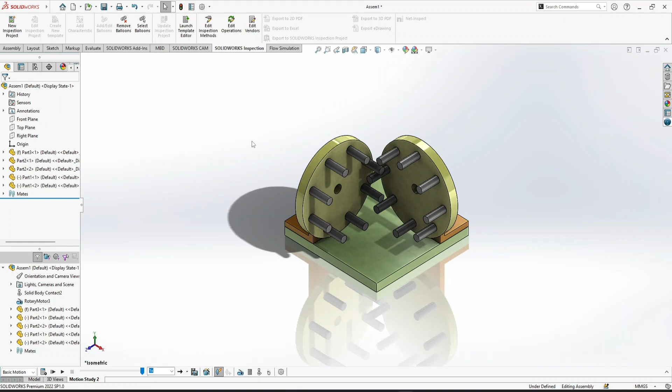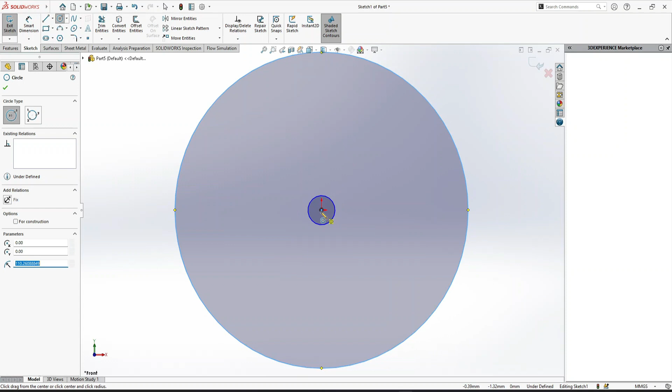Starting from the new part, we have to make three parts, then we will assemble them. So the first part will be the disc that will rotate. Select the front plane, sketch a circle, first and second and the third circle. The third circle, make the relation for construction and smart dimension.

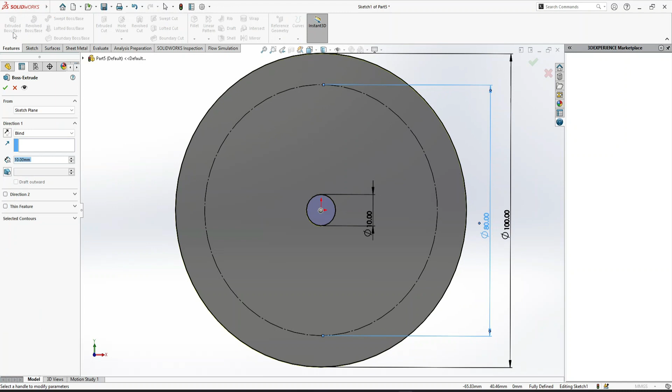The first one is 100 millimeters, second one is 10 mm, and this one is 80 mm. Now we are simply going to features, extrude boss base, 10 mm and OK.

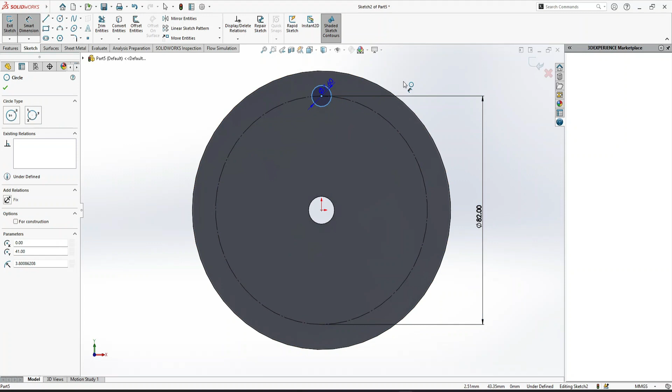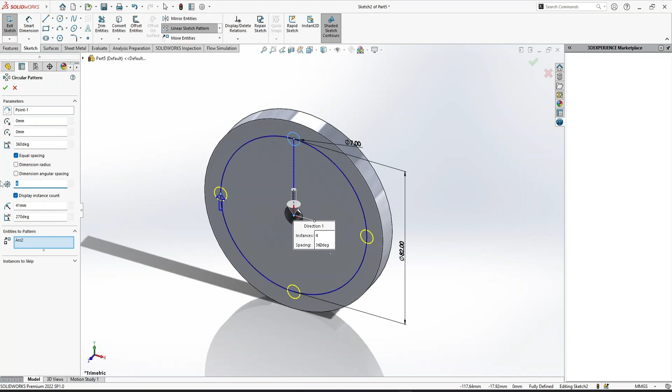Select the face, sketch, and here again I am going to make one circle, and for construction the second circle, this is going to be 82 mm, this is of 7 mm, and simply features extrude boss base, or you can extrude it here, or we have another option. We can go to sketch, circular sketch pattern, select the circle and 8 and OK.

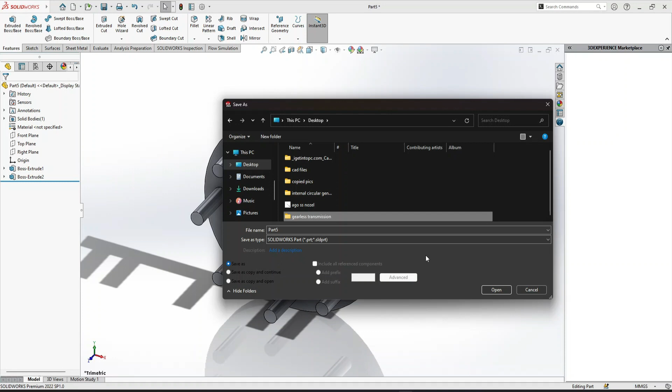Now features extrude boss base, and this is going to be of 25 mm depth and OK. Now after that you can save it. I'm going to desktop and new folder, that is gearless transmission, and in the gearless transmission this is our disk. Okay, now let's change its color. Okay, and now boss extrude, select this, and I'm going to change its color, and again Ctrl S to save it.

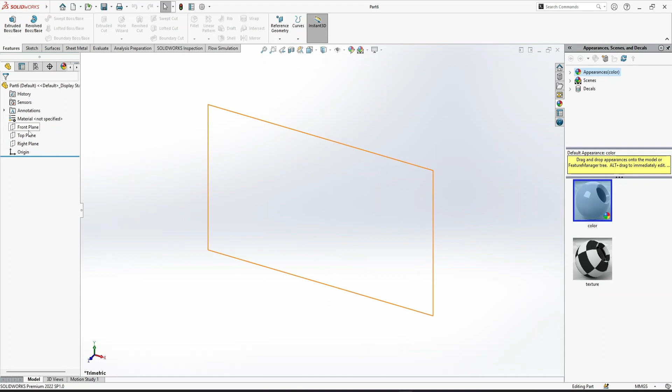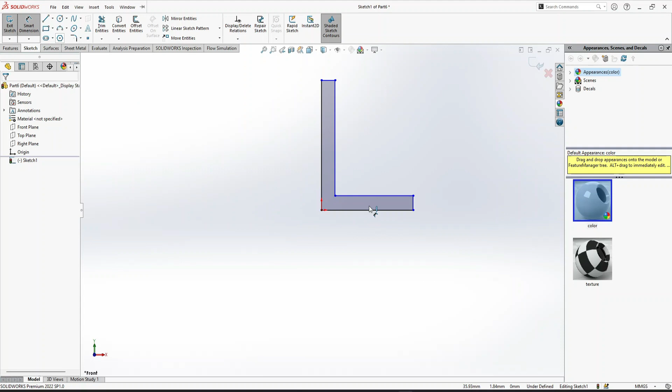Now the next part is front plane, or you can take a right plane, line from here to the origin. Close it, escape. Now select this line and this line and make the relation equal. Smart dimension, this is of 40, this is of 80 mm, and this is 6 mm. Control 7 for isometric view.

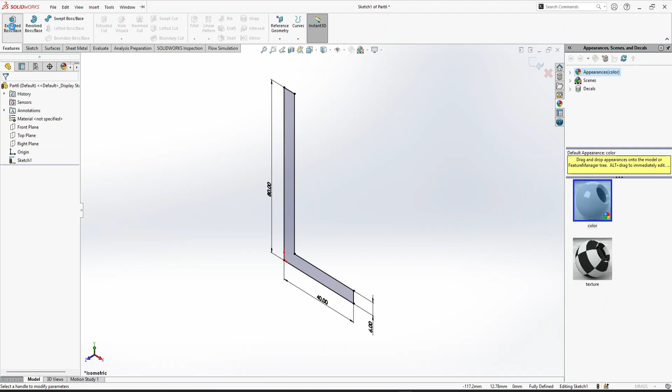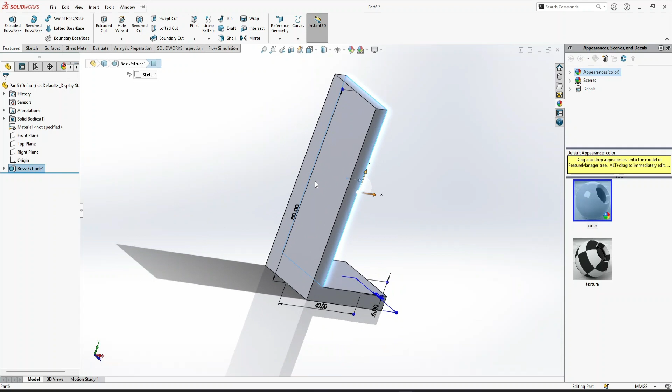And now features, extrude boss base, this is going to be of 30 mm and OK. One more thing, edit features, and we are going to use the mid plane. Now select, you can select this face or this face, it's up to you, both will work the same.

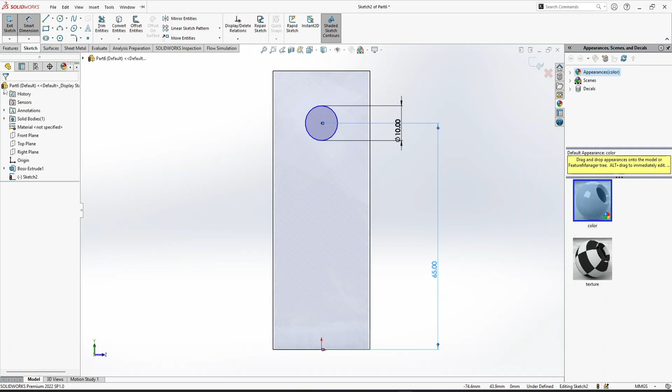Circle, smart dimension, this circle is of same 10 mm, and from here to the bottom distance is 65 mm. And features, extrude cut and OK. Now control 7 for isometric view. I'm going to fillet this edge, this edge. This is going to be 10 mm, okay.

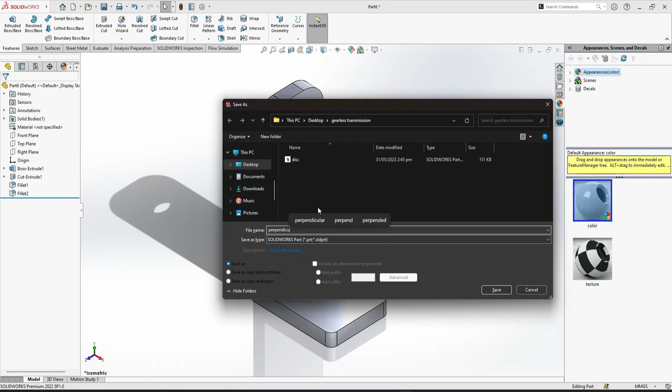And fillet this one and this one. This is going to be of 3 mm and okay. Control S. This is, you can say, the holders, or this is perpendicular support. Now next is the base.

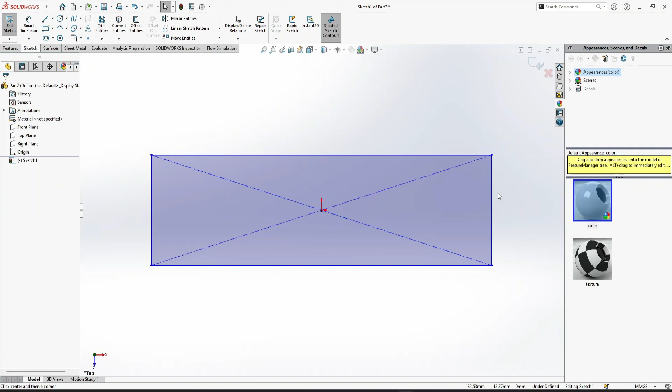For the base again part, and a simple top plane sketch. We have to select the center rectangle and make a rectangle, escape, select one and the second perpendicular line and make the relation equal. Smart dimension, this is of 130 mm of both sides. Now features extrude boss base, this is going to be of 10 mm and okay.

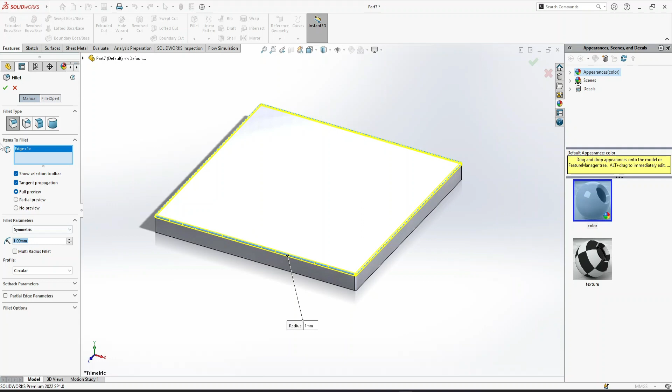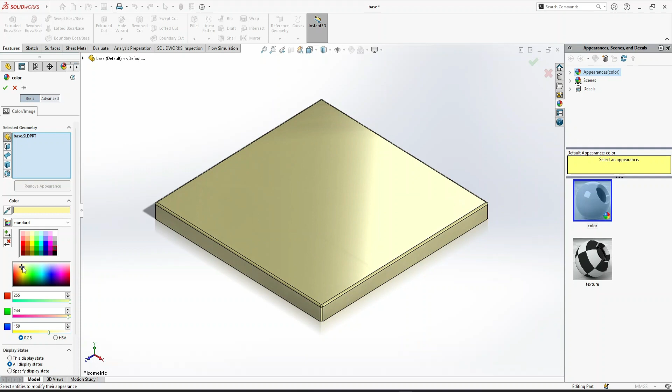And we can fillet all the edges by 10 mm and okay, not the 10 mm, we can only do 1 mm. Again, fillet for 1 mm and okay. Now control S, this is our base. Control 7 for isometric view, appearance, and I'm going to control S and let's close.

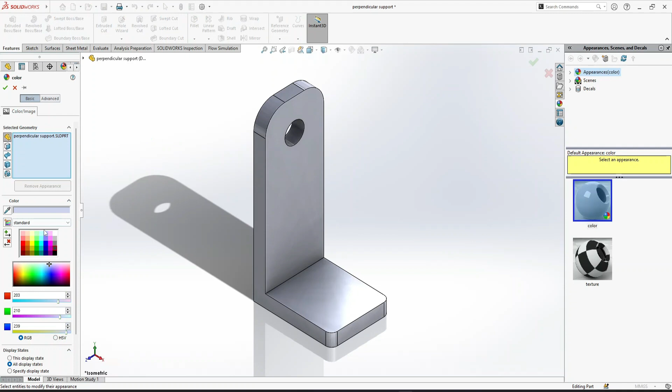Okay, one more thing, not the disk basically. Support, we forgot to change its appearance, so again I'm going to change its appearance like this. Control S and close. Now we are moving to do the assembly drawing, so again from the new select the assembly and okay.

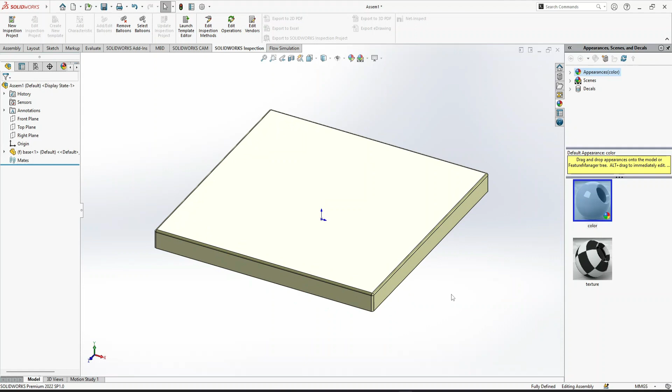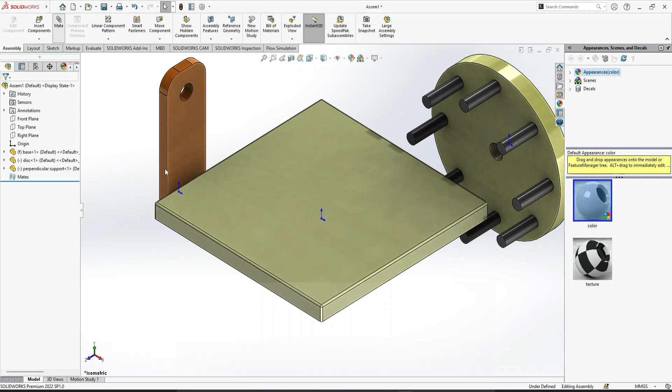Now in the assembly, the very first is base, but we are first going to turn the coordinates on. Now move your cursor to the origin and just click on it. Control 7 for isometric view. Now we are going to insert the remaining two components, here, the first one and the second one. Okay, these two colors become similar, so we will change it later, but now mate this one and this one.

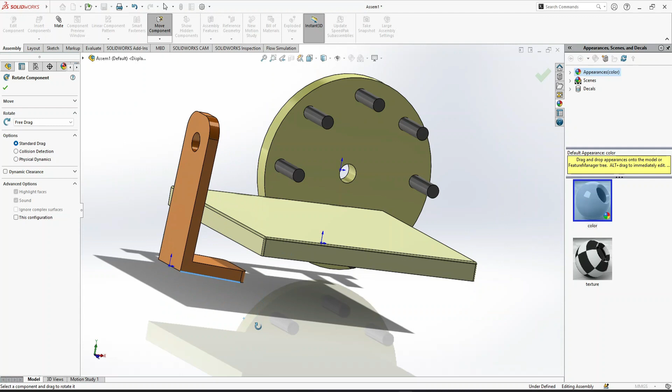Okay, this one and this face, but we want to turn this like okay. Escape, let me rotate components, and we are going to, okay, wait a minute. Control 7, control Z. We are going to delete this coincident mate. Control 7 for isometric view, rotate component. We are going to rotate it like this.

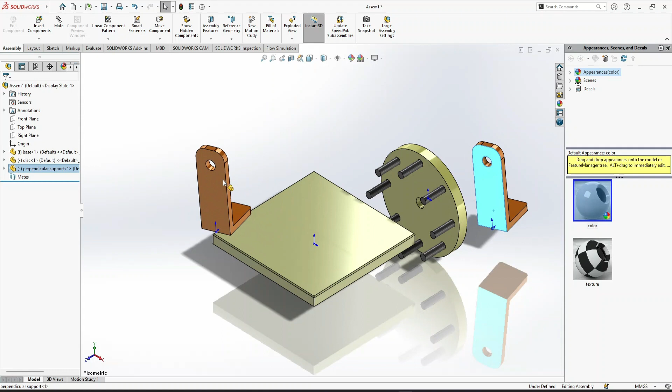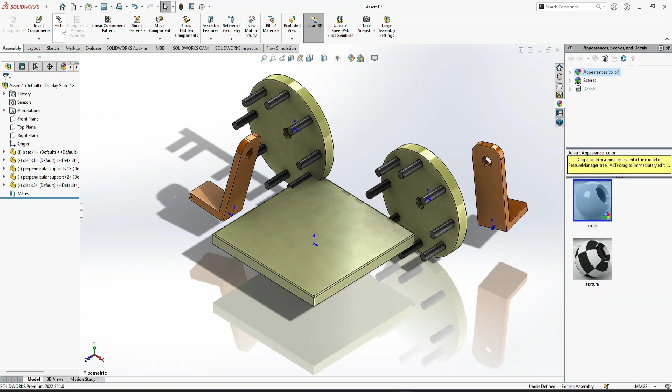Escape. Now press control and just click on the part and take it here. It will make a duplicate. Press control, click on the disk and take it here. Now we have four similar parts. Now again rotate and here. Escape, mate, this one and this face.

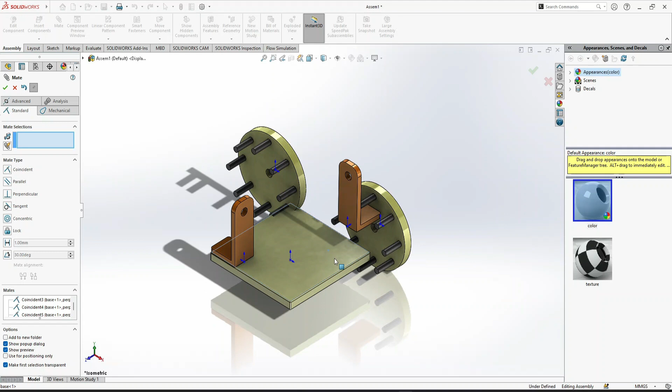Okay, now this one and the bottom. After that we have the sides, this one and this one. Control 7 for isometric view. Now again, same this side and this side. Okay, take it up. This is the base and the lower. Okay, done. And in the last, this one and this one.

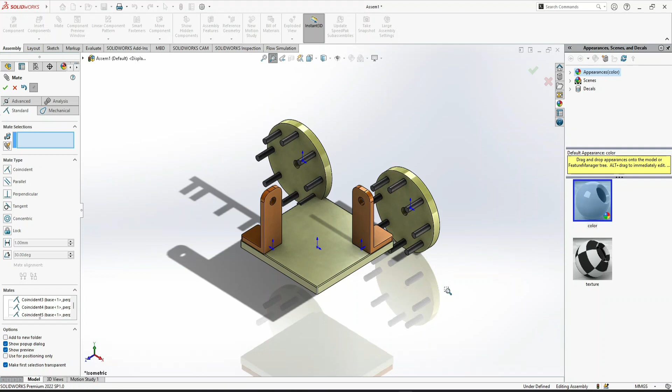Control 7 for isometric view. Now we have select one and second, done. Now here and here. Okay, this is the concentric mate. You can see this is a concentric mate.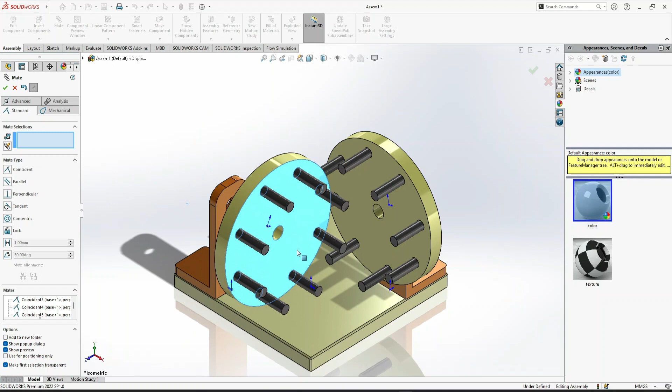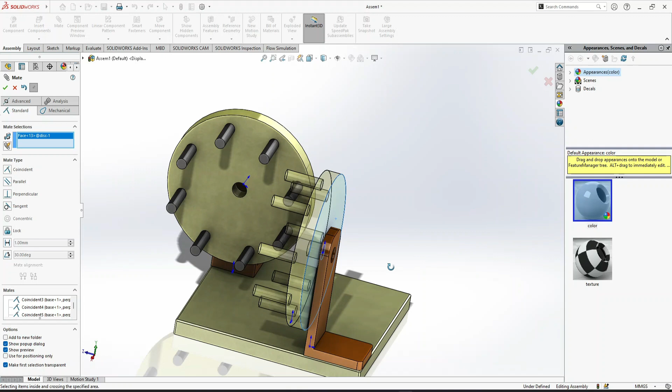And now next is take it here, here, and select this face and the back side of the disc, and from here take it to a distance of 10 mm. And okay, the same we are going to do for here, and this is going to be at a distance of 10 mm. And okay, control 7 for isometric view.

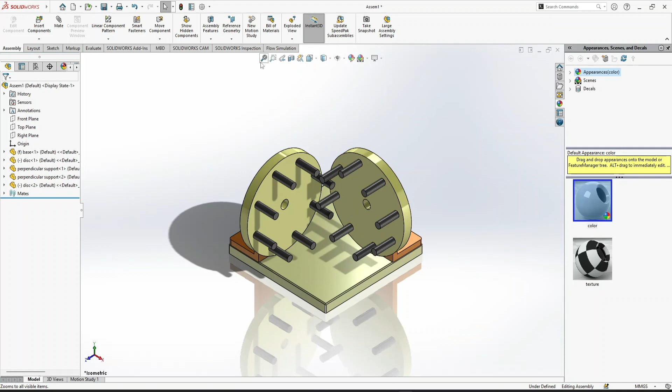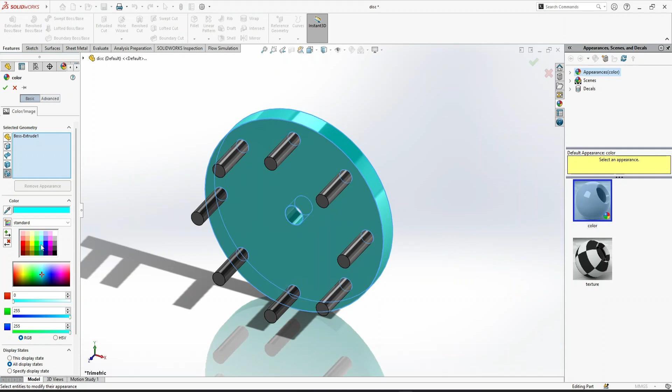Let me turn this off and like this. Now, okay, let's change the color first. I'm going to change its color. It should look good. Okay, let's see. Control S, and okay, now you can see this is intersecting the second column, or you can say the shaft.

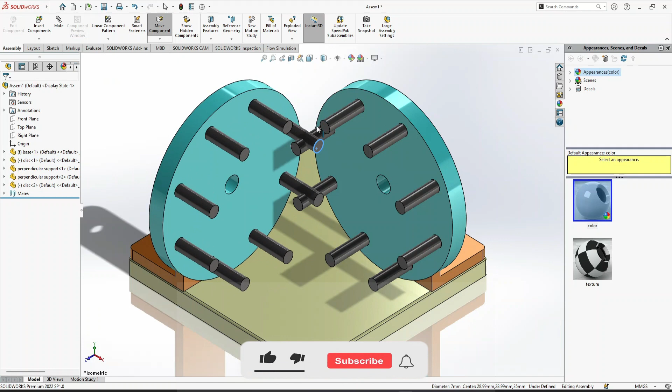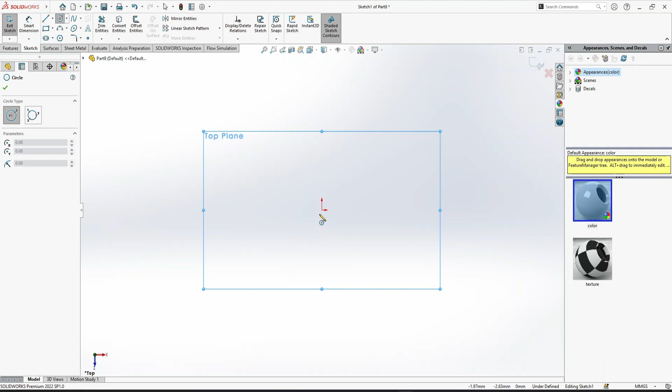Okay, one more thing, if you want you can place a pin or the shaft here. Let's do this. New part, top plane, sketch, circle. The circle is of 10 mm. We are going to extrude it up to 35 mm. Okay. Control 7 for isometric view.

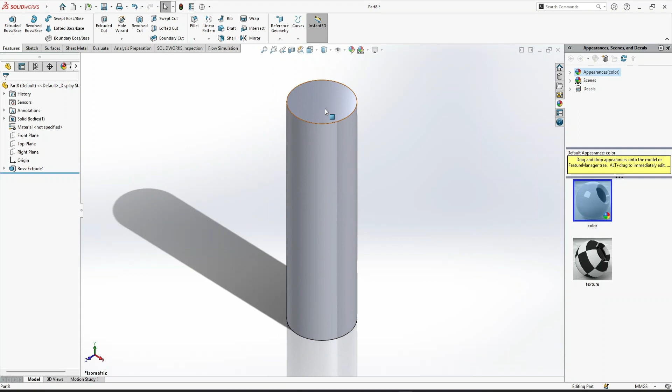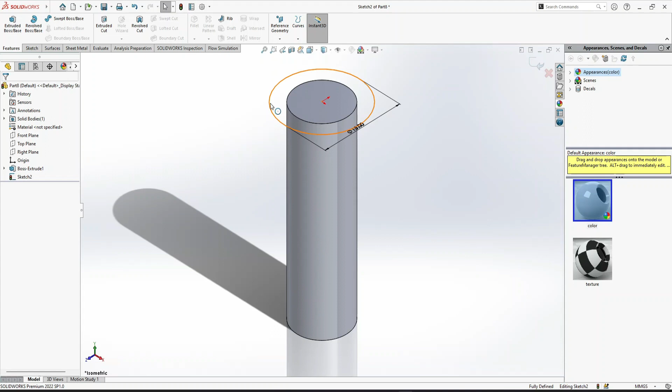Select one of the faces. This is going to be of 15 mm. Control 7 for isometric view, and we are going to extrude it. Okay, let me correct this. We are not going to make a circle on it. We are going to make a hexagon, and this hexagon is going to be from here to here.

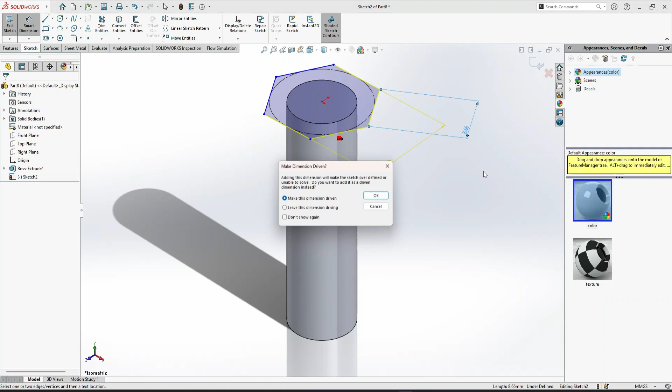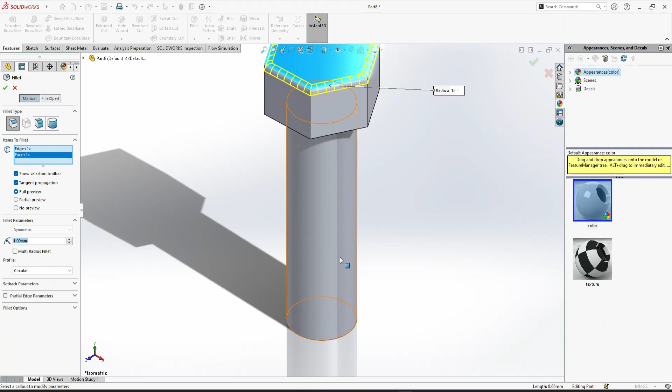Distance is 15 mm. That means the side will be 8.66. Features, extrude boss base. This is going to be only 8 mm. And okay. Next is fillet, 1 mm, here and here. Done. Now we want to make threads over it.

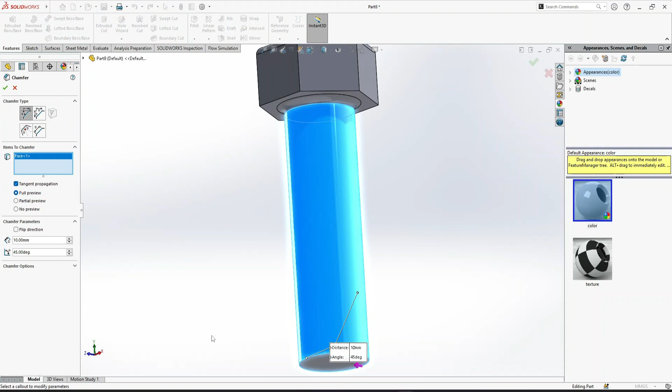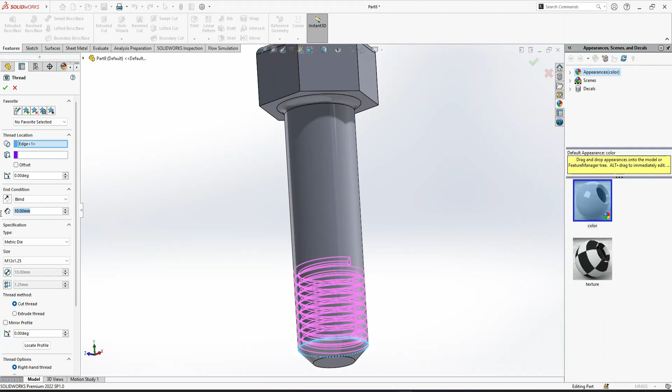Okay, one more thing. We are not going to do fillet here. We will chamfer this edge. Chamfer, not the face. And this chamfer is going to be of 1 mm or 2 mm. Now we have the thread. We are going to make threads on it up to 25 mm and done. Now next is Control S, and this is our bolt.

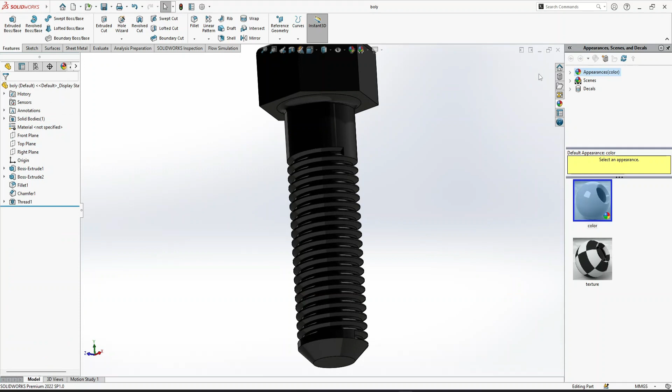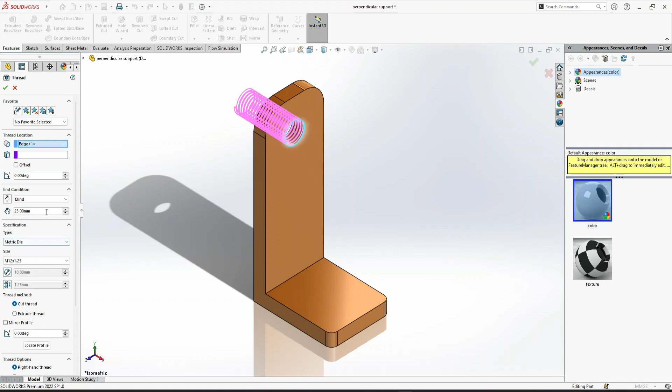Okay, I just save it by body. That's the bolt. Appearance. This is going to be black. Control S. Now next we want to make a thread on it so that it will tighten the disc. Thread. Okay, from here, and this is going to be of 25 mm, and extrude thread and done.

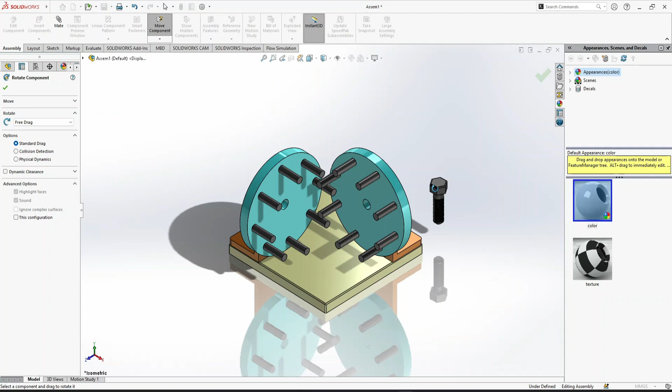Simply Control S. Let's save it and move to our assembly. Control 7 for isometric view. Let's insert the last component, that is the bolt. Let's rotate it, make a copy, rotate it from here and escape. Now mate,

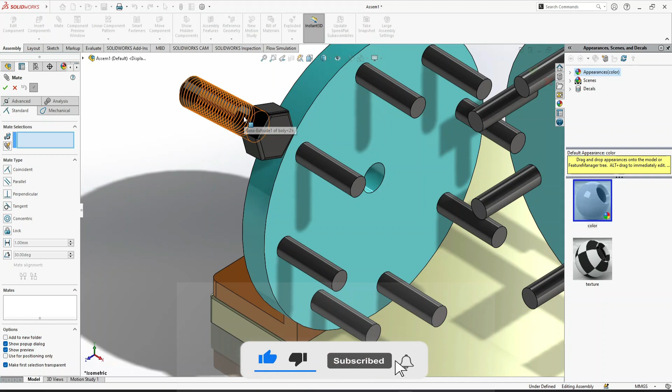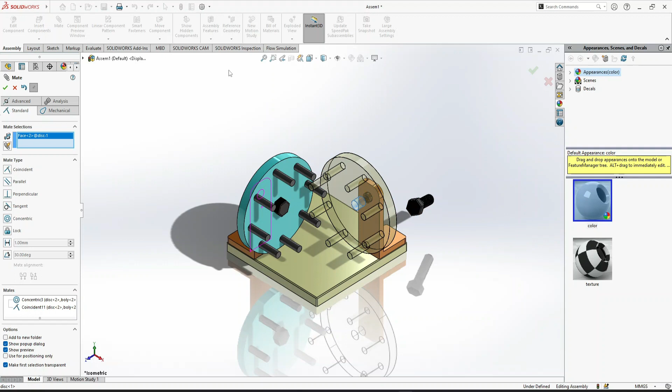select these two. Okay, now take it out, select the disk and this one, so it will tie the disk on the support. Control 7 for isometric view. Now again this one and concentric, done. Now next is this one and let's rotate it,

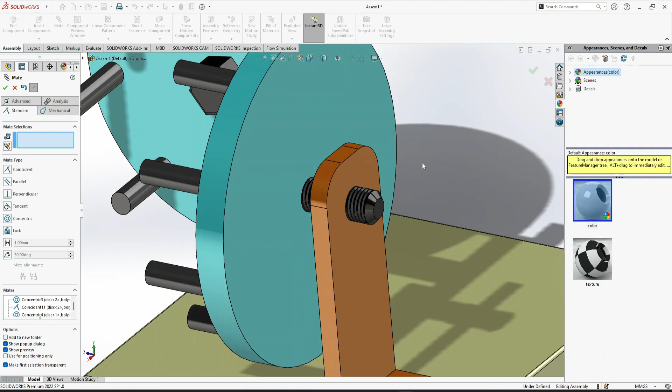press Alt, and now you can see, and done. The assembly is done. Now Control S, save it, Control 7, and now you can see if I just rotate it, it's rotating by itself and it is not turning this second disk.

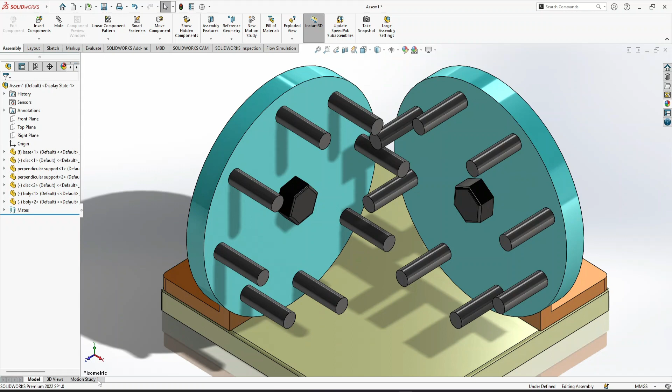So let's move to motion study. From here we are going to do the basic motion. For the setting, you have to come here, motion study properties, click here, take it to high, and here frames per second. First set it as 50 and done.

Next you can find the motor. Select the disk, and this arrow shows the rotation, that is counterclockwise, and here you can find the speed, 100 rpm. Let's make it 15 rpm and done. After that you have to come here, this icon that looks like a calculator. Here you can see calculate, just click on it.

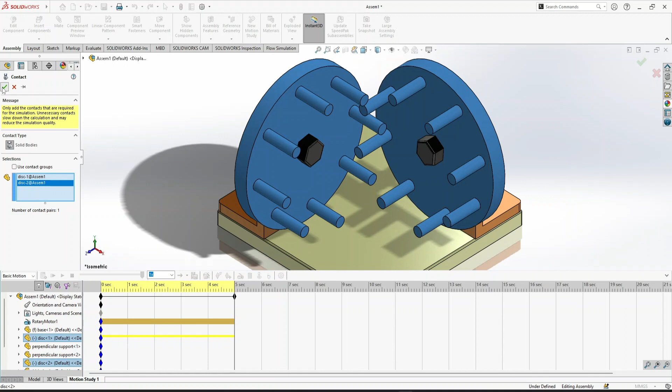You can see this disk is rotating but it is not affecting the second disk. So I want that when I rotate this disk by some motor or the shaft, it rotates the other disk. By this I will convert the torque or the power from this disk to this one. For this you can find the option contact, just click on it, select this disk, after that the second one, and okay. Now see the magic, calculate, it's rotating the second one.

Okay, now you can increase its timing, again calculate. Okay, look, the one comes and takes the other with it. Now if your system spec is good, you can go to this setting and change the fps, that means frames per second. The higher the fps, the better the result. 100 fps and okay.

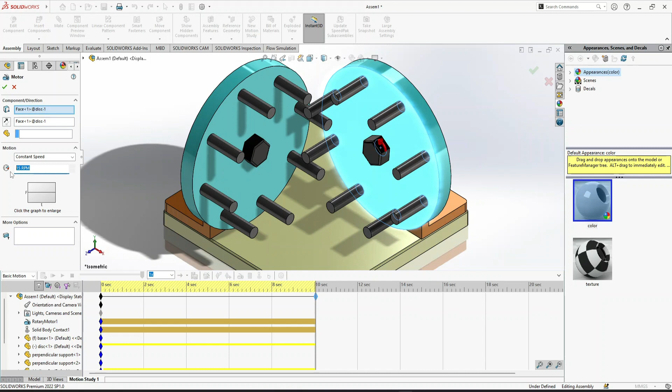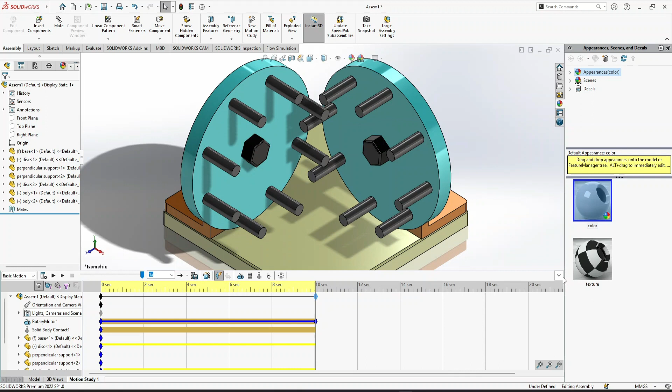And you can increase the speed of the motor, that means the rpm. I'm going to make it 20 rpm, and done. Once you change any setting in the motion study, you have to again go to calculate. Now you can see its speed increases. Okay, so let's take it here. You can play it again and check its motion. You can slow down its speed by changing the rpm and check how it's moving, how it's taking the second disc.

So this tutorial is going to end here.